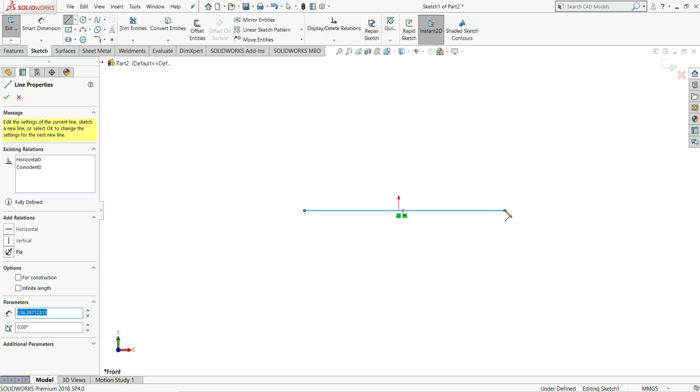So now we will design our first part, which is the base. For that I will select here front plane, sketch. Here I will draw one sketch. For that I will select here one line, draw one horizontal line like this, then vertical, then again some line angular like this.

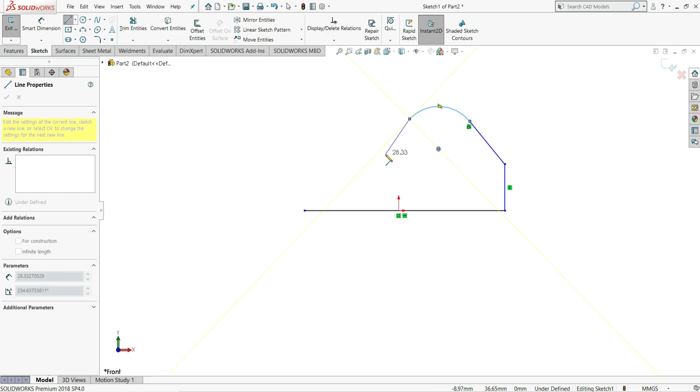Then I'll convert it into an arc by coming back to this point, and you can see it will convert into an arc. Okay, so like this I will draw one arc, then again I have to draw one arc, so I will draw like this. Okay, now we have to select the center point of this arc and this point and make it vertical. Just make this point and this point also vertical.

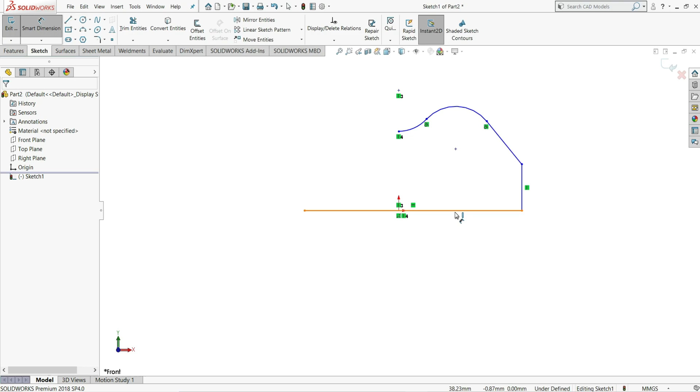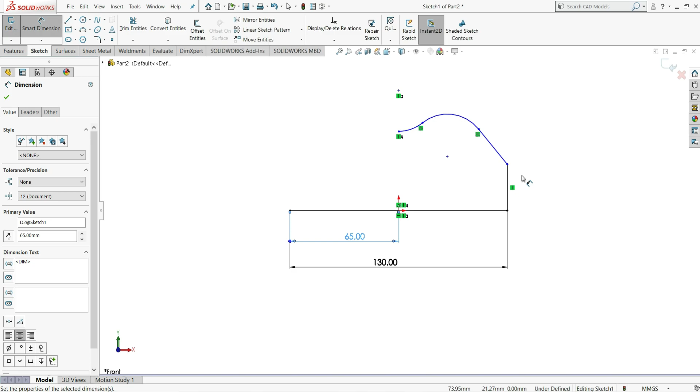Okay, so now let's assign dimensions to this. Select smart dimension. This distance we have to give 130 mm. And from the center point it should be 65 as we want a midpoint. Now we have to give this vertical line distance 32 mm. Enter. Next, from this point to this, we'll give distance 60 mm.

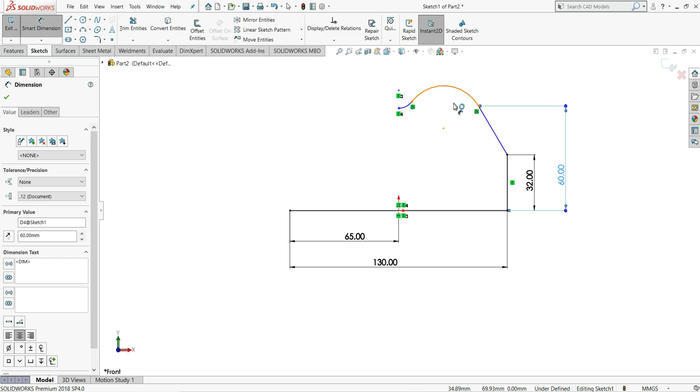Here we have to give a radius 17 mm. Okay. 16 mm. At this point, we have to assign a fillet. So I will select sketch fillet. Select this point. Give here radius 10 mm. Okay. Close it. Now just mirror this sketch that we have drawn.

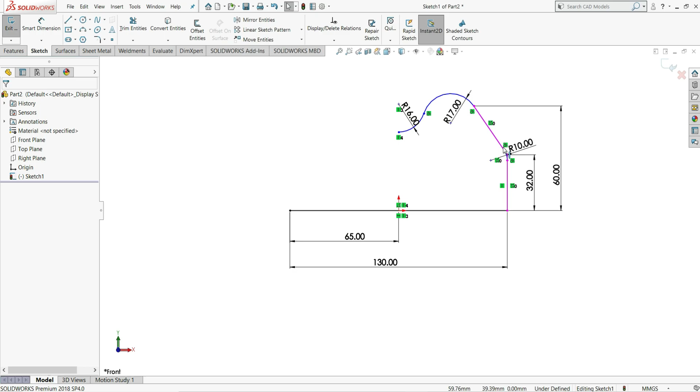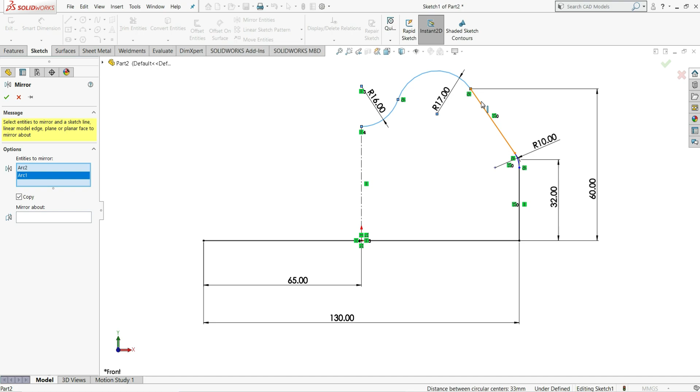I will just draw a center line like this. Okay. Now we have to mirror this sketch. So select mirror entities. Select this arc, then this line, this fillet. It's selecting a point, delete this. Select fillet. Then select this line. Mirror about center line, and then OK. So now you can see it will look like this.

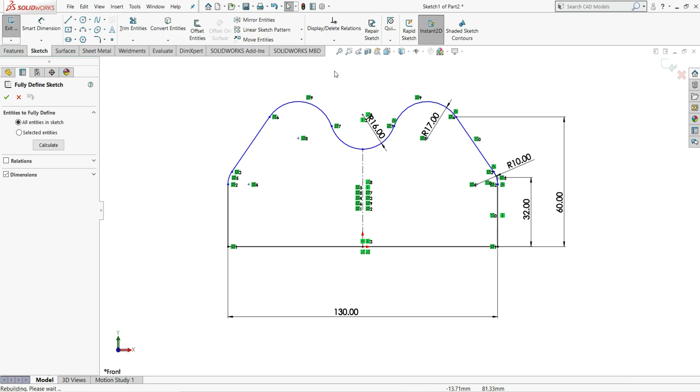So our sketch is now overdefined. Let me delete one of these dimensions. Let me make it fully defined. Just select calculate here, and you can see our sketch is now fully defined. Click on OK. So now we'll just extrude this. Select the reverse direction and give here distance 40 mm. OK.

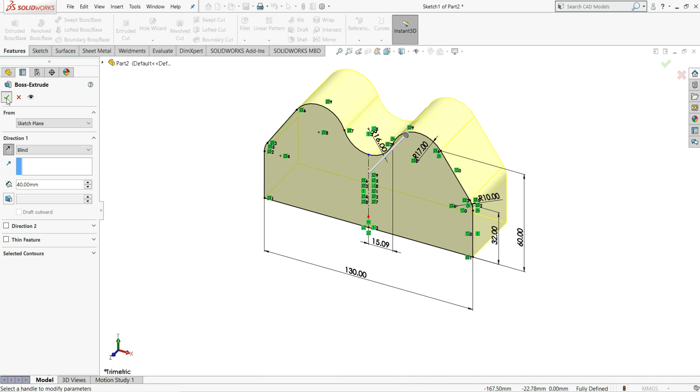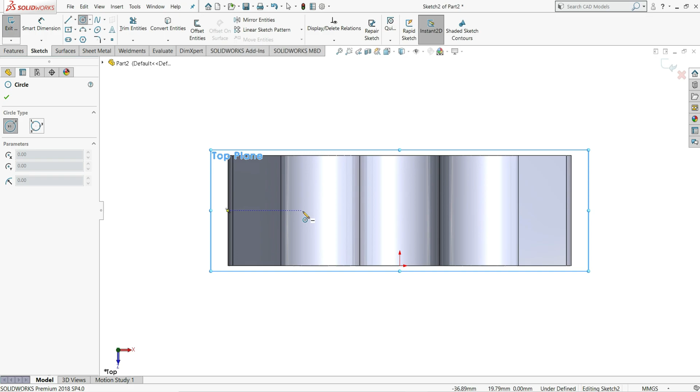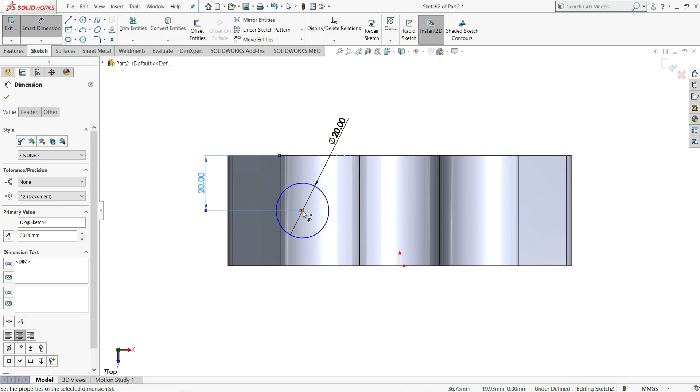Now we will select here top plane and then sketch. Here I will draw one circle, the center point on this line. You can see, draw one circle like this. Now select smart dimension. Diameter will be 20 mm. Enter. Then from this point to this line distance, we have to give 20 mm. From this point to the origin distance, it will be 36 mm. Okay.

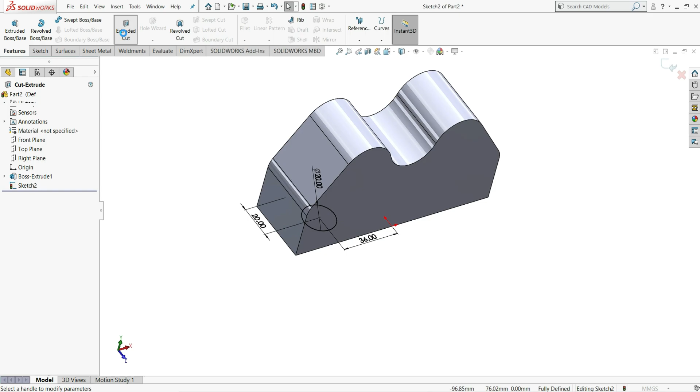Now just extrude cut this. I'll select here extruded cut. So I'll just select through all. Okay. That's it. We have to select here through all. Then okay.

Now we have to mirror this cut extrude, same on this side also. So I'll select mirror. Mirror plane will be our right plane, and I'll select here cut extrude feature. Okay, that's it.

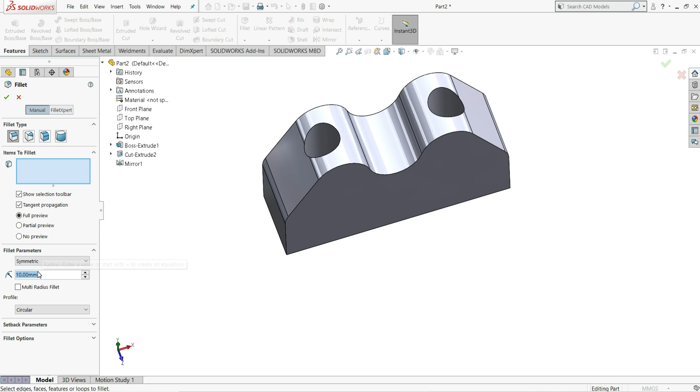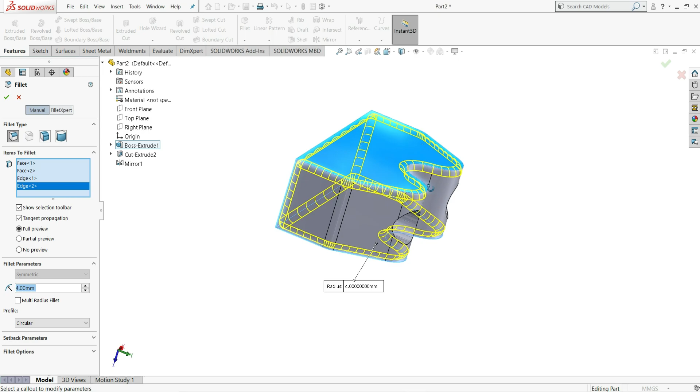We have to just apply here fillets. So I'll select here fillet. Give here radius 4 mm. I'll select this face, same as this backside face, so that all these edges will be selected. Now we have to select this edge also, same as this edge. So that's it. Then just click on OK.

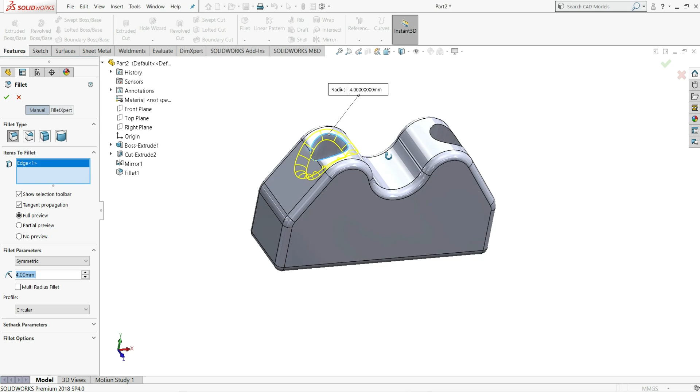Now we have to assign another fillet to this hole. I'll select fillet here. Then just select this whole area. Select this whole edge. We'll select these two edges of the hole and give a 4 mm radius. Okay.

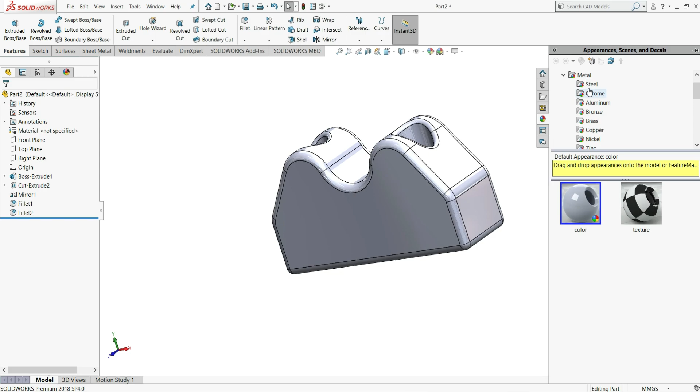So that's it. Let's assign some material to this. In the appearances, I will select metal and then steel. Then just double click on the polished steel and you can see it will look like this. Okay. So our base is created and it's ready. Now just save it by pressing Ctrl+S. Rope clamp base. Okay.

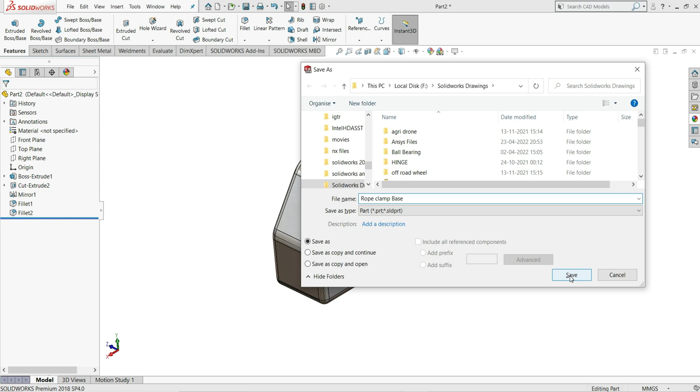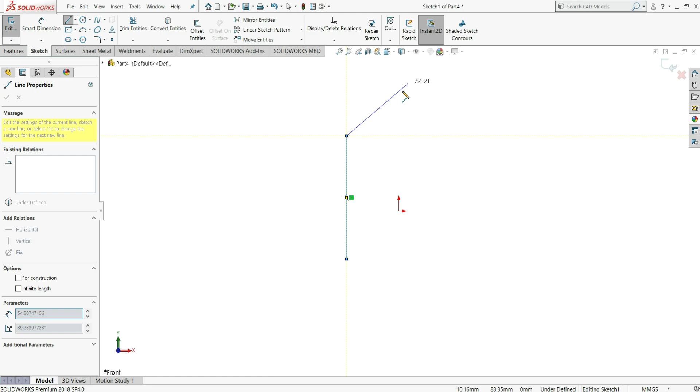Now we will design our second part, which is the U-type nut. I will select front plane, sketch. Here I will select a line, then I will draw a vertical line. Then I will draw an arc like this, horizontally. These 2 points will be horizontal, so that I will draw an arc like this. Then up to this, I will draw one line. Right click and then select.

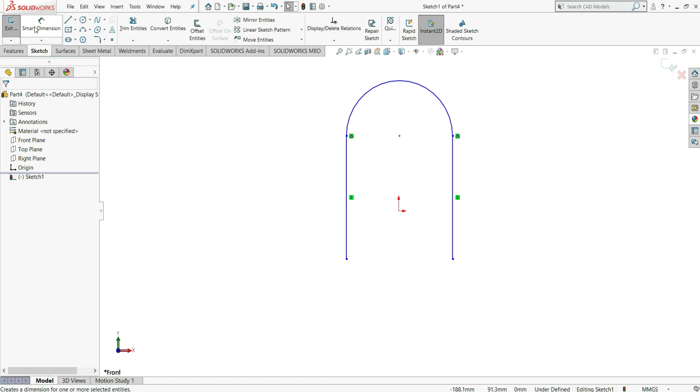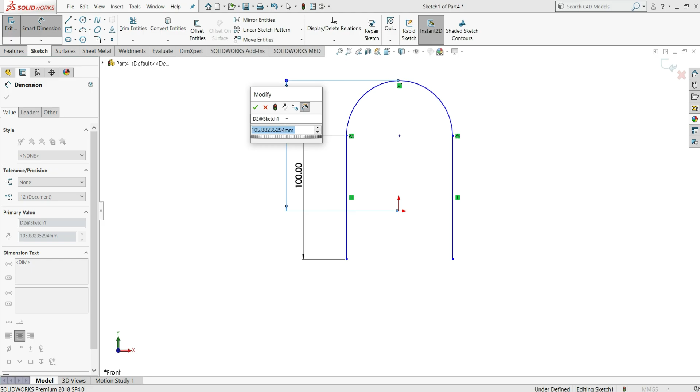Now let's assign some dimensions to this. So I will select smart dimension. And I will give 100 mm from this point to the center point of this arc. Will give this 40 mm. Enter. Let's give distance from this line to this line. Make it 72 mm. Enter.

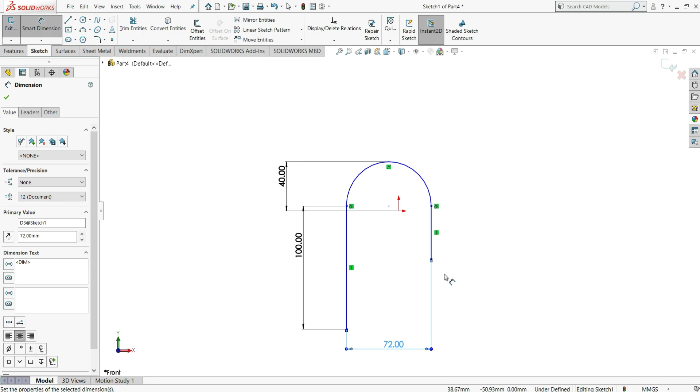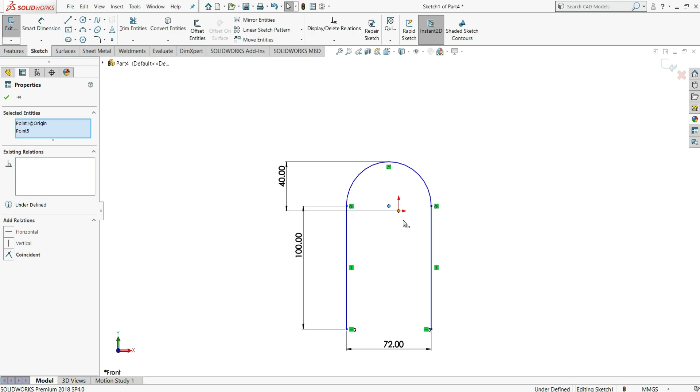Okay. So now escape this and select this point and this point and make them horizontal so that they will be on the same line. Now we have to make this fully defined. So for that, I will just select this point and the origin point and make them vertical, and you can see it is now fully defined. So that's it.

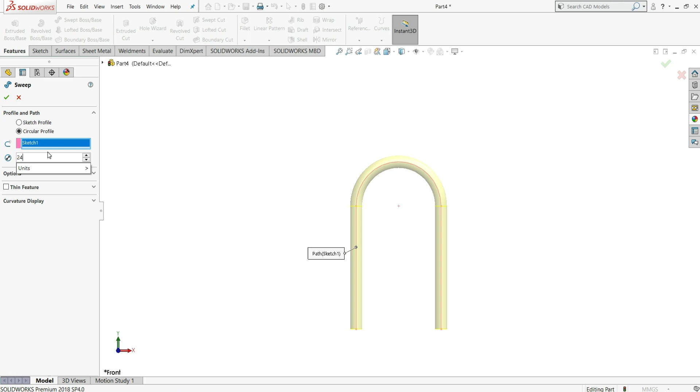Now we'll go to features and select swept boss. Select circular profile. I'll select this sketch. We have to give a diameter of 24 mm, enter, and then OK. Now we have to apply threads to this. So I'll select insert, then feature, and we have to select the thread option. Click on it.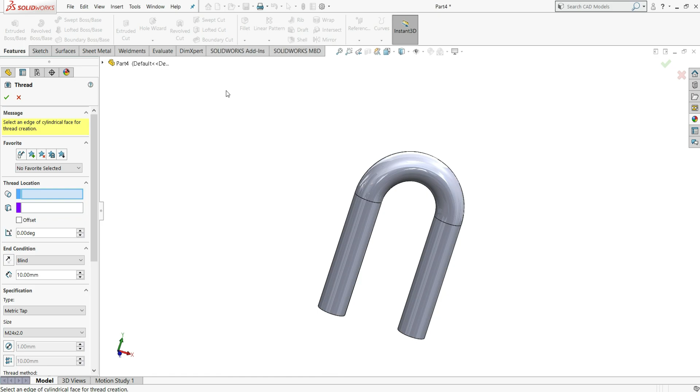Then we have to select the edge. So I'll select this as the edge so that our thread will start from this edge. As you can see, it will start from this edge. Now in the type, we will select metric die. You can see I have given M24 x 2.0. Nothing else we have to change here. We have to keep cut thread and right hand thread.

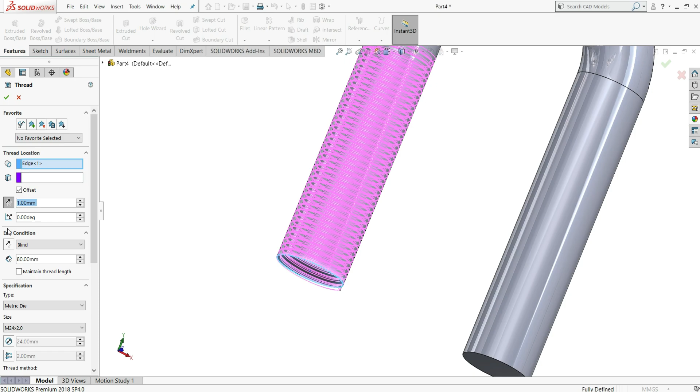We just have to give the end condition and this distance. Okay, so I will give it 80 mm. Then you can see at this last edge, the thread that will be drawn here will not be perfect, as this will be the starting point of the thread. So for that we have to just extend this thread up to this line, so I will select offset. I'll reverse its direction so you can see it's in this direction. Let me give it 3 mm. So you can see it's 3 mm in this direction and 80 mm in this direction.

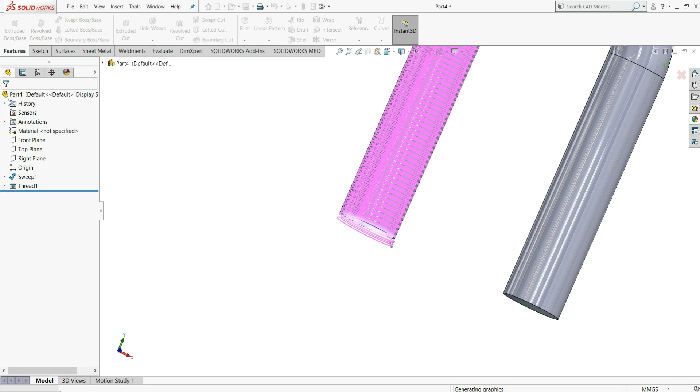But actually it will not be 80 because we have not selected maintain thread length. Okay. So just click on it and you can see it will maintain the thread length of 80 mm from this edge. And it will be 3 mm on this side from this edge. So that's it. Click on OK. So now you can see our threads are applied to this.

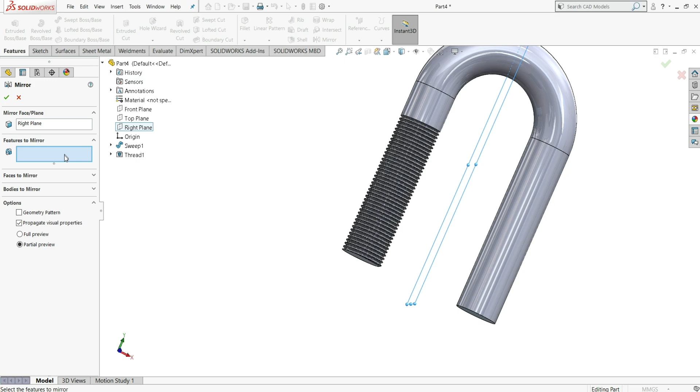Now we want threads on this side also. For that we'll just mirror this. I'll select mirror. We'll give the mirror plane as the right plane, and in the features I will select thread. You can see in the preview the threads are applied here. Click on OK. Okay. So now our U-type bolt is ready.

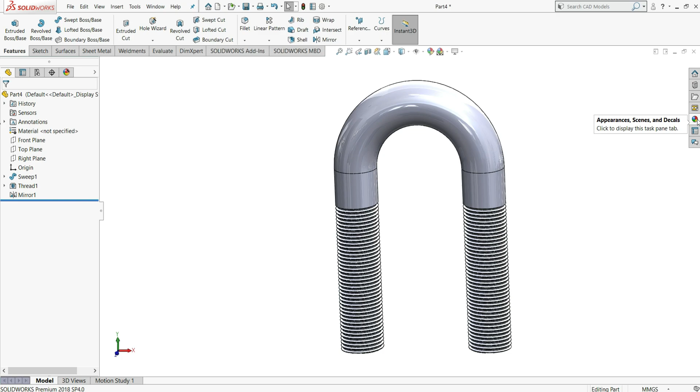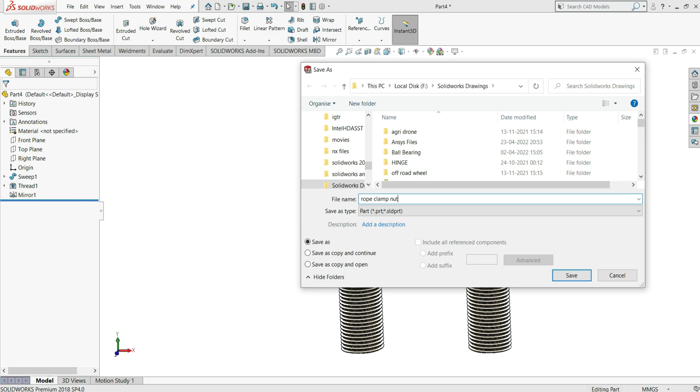Now let's give it some appearance. I'll select polished steel from the steel. Okay. Now let's save this by pressing Ctrl+S, and we'll give it the name rope clamp nut. Okay. Save this.

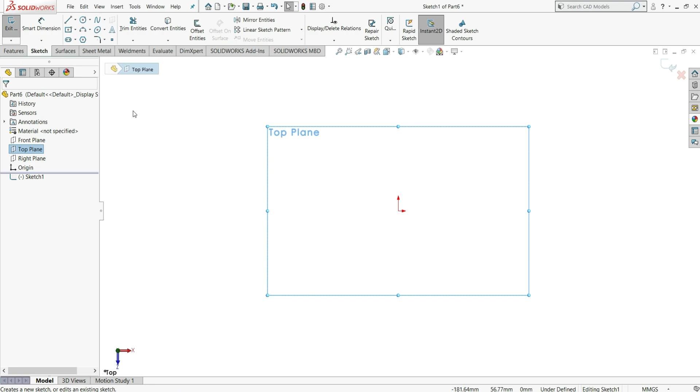Now we will design our last part, which is the hexagonal bolt. So select here top plane, sketch. Here I will draw one hexagon, 6 sides. Select the center point, draw one hexagon like this. Now select smart dimension and give this circle diameter 32 mm. Enter. Now select this origin point and the end point and make them horizontal, and you can see our sketch is fully defined.

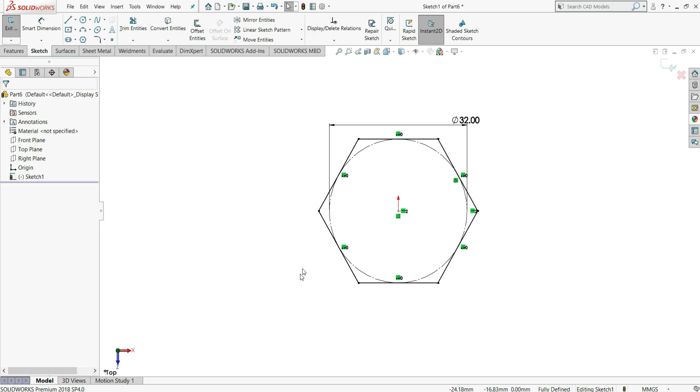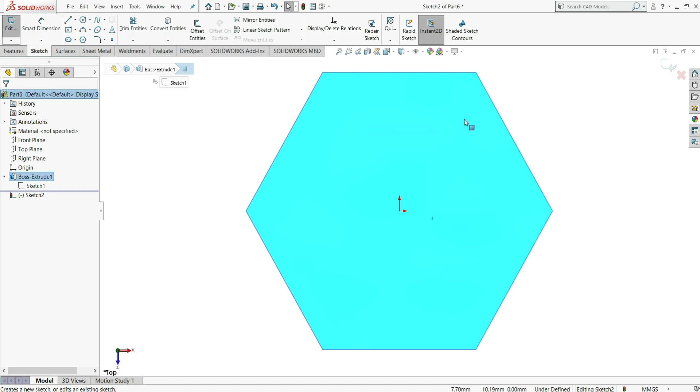Let's go to features and extrude this in a reverse direction, and we'll make it 12 mm. Okay. We have to select this face and then sketch. Here we'll draw one circle. Dimension 24 diameter. Okay, this.

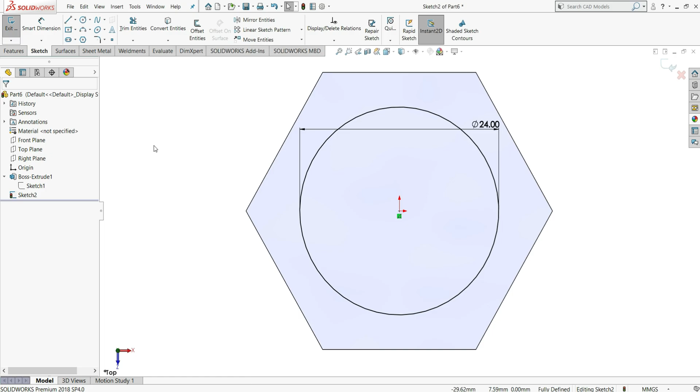Now extrude cut this. 22 or 30, you can keep it as it. You can keep anything, so that it will cut through all. And you can see it is through all cut. Now we have to apply threads to this. So I'll select here insert, then features, then thread.

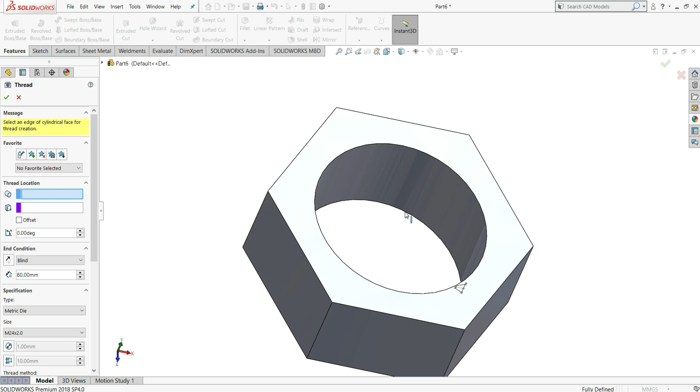Select this lower edge. Let me give it end condition to be 15 mm. And you can see it's dual thread. Same as it is, we want this side. So I'll select offset, reverse direction, 3 mm same as it is. Click on maintain thread length.

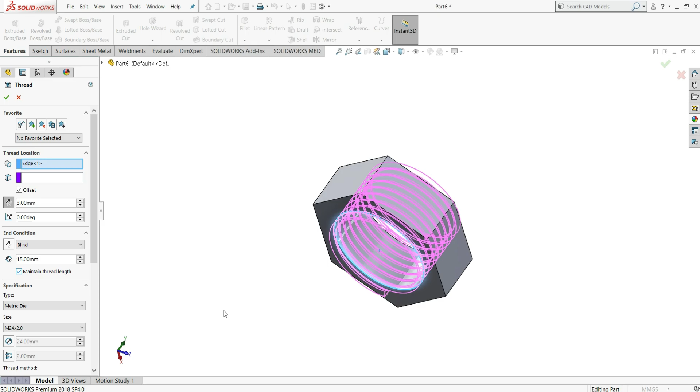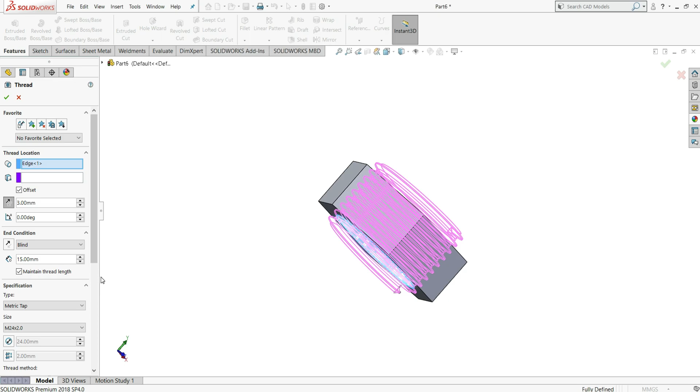Okay. Now in the type, we have to select here metric tap. And the size will keep same as it is, M24 x 2.0. Thread method will be cut thread and right hand thread. Everything will be as it is. So now just click on OK and you will see the thread is applied.

Now just select this face, then sketch. Now here I will draw a circle like this up to this edge. Then select this circle and this edge and make them tangent. So now you can see it's fully defined. Now just select features and extruded cut.

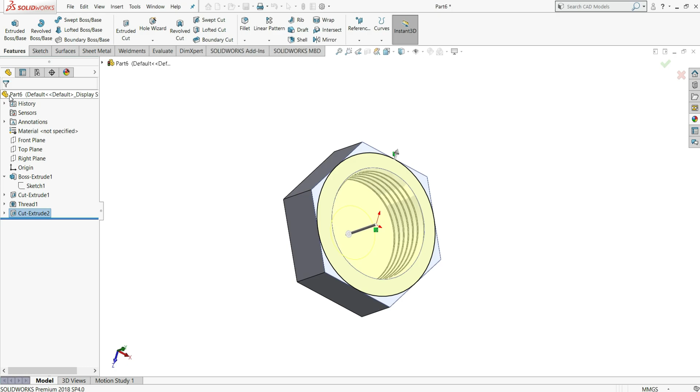Distance 10 mm. Then click on flip side to cut as we want to cut the outside part. And then we'll give here a draft of 45 degrees. Then just click on OK, and you can see this outer part will be cut. Same as it is, we want it on this side. For that, we want one plane in the middle of these two faces.

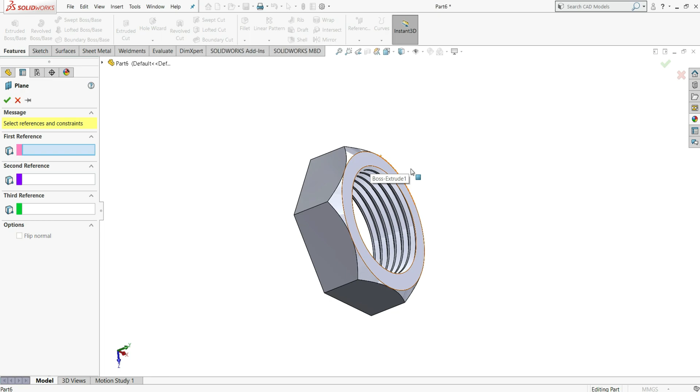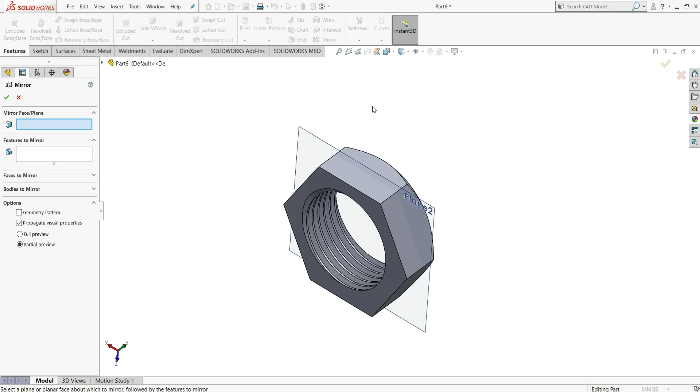So I will select reference plane. Select this face as a first reference, then this bottom face. And you can see the plane between these two faces will be created like this. Click on OK. Now we have to mirror this. So I will select mirror. Then just select this face as a mirror plane. Then in the features, I'll select this cut extrude. Okay.

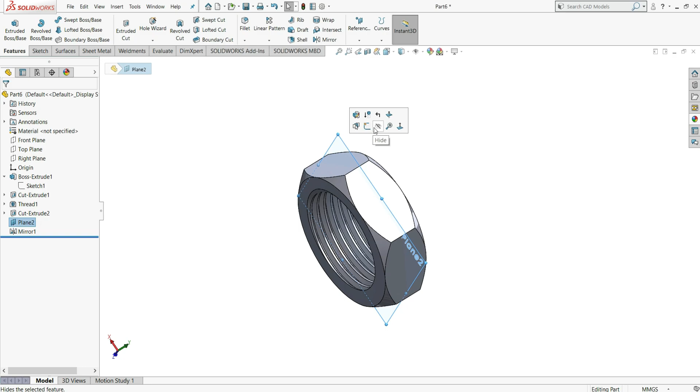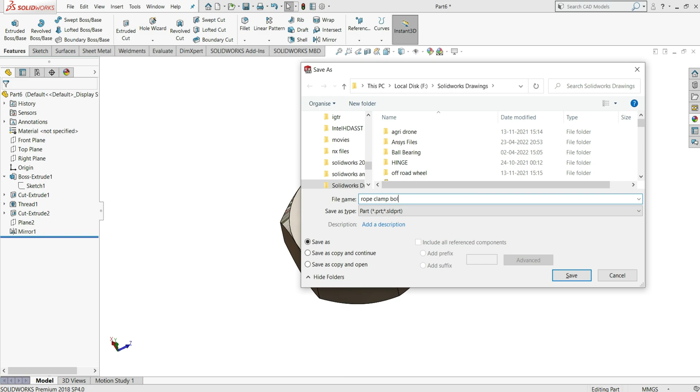Select this plane and hide it. So now our bolt is ready. Just give it some appearance, polished steel. Let me save it: rope clamp bolt. Save it. So now we have created all of our parts. Now we will proceed further for the assembly of these parts.

So now we have opened here a new assembly and now I will import some parts in this. So for that I'll select here browse and I'll select the parts that I have to import. I'll select here rope clamp. So I will import here rope clamp base, rope clamp bolt and nut. I have selected these three parts. Then just select open. Now one by one click on this graphical area.

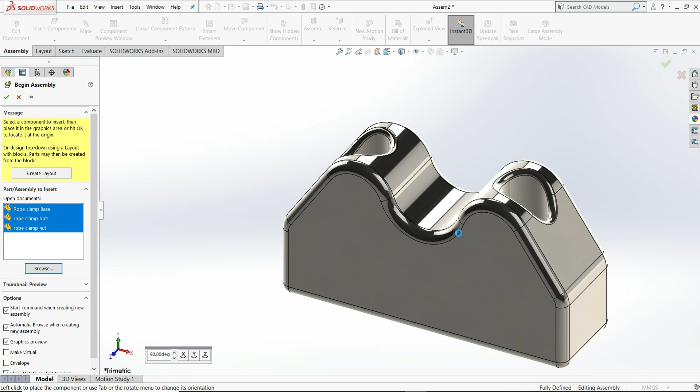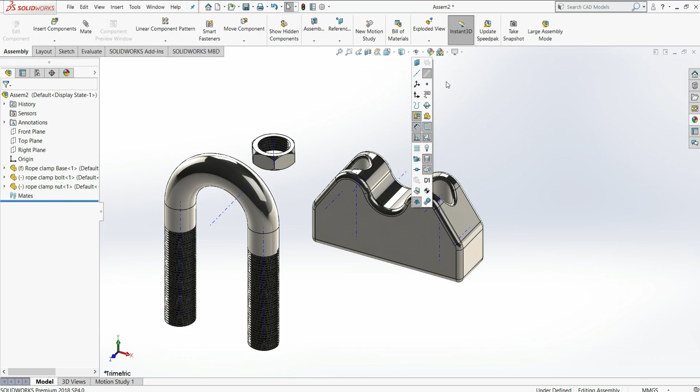So I will click here. So one part is imported. Same as it is, click here so that the second part is imported, and then the third part. So now all of these parts are imported here. Now I will just select this eye button and select view temporary axes. So you can see these axes are shown. Now you can see this base is fixed and it will not move. This will move, this will move, as it is not fixed.

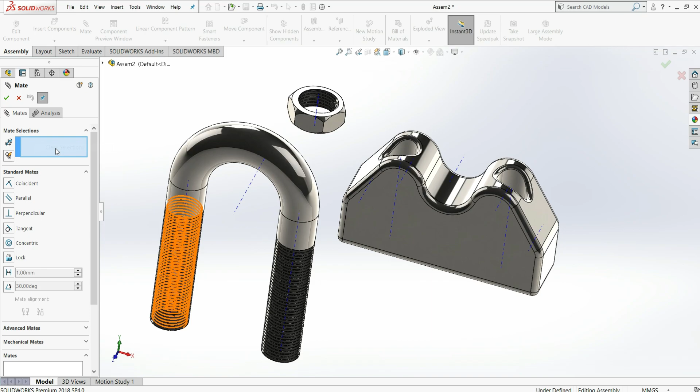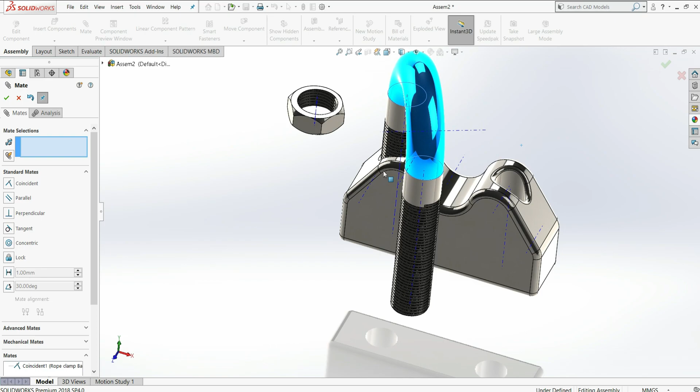So now we have to select here mate. So now I'll select the axis of this U-type bolt and the axis of this hole. Once I click on both, just click on OK. Now you can see once I rotate like this, it will move. So we have to fix this axis also. For that, I'll select this axis and the hole axis.

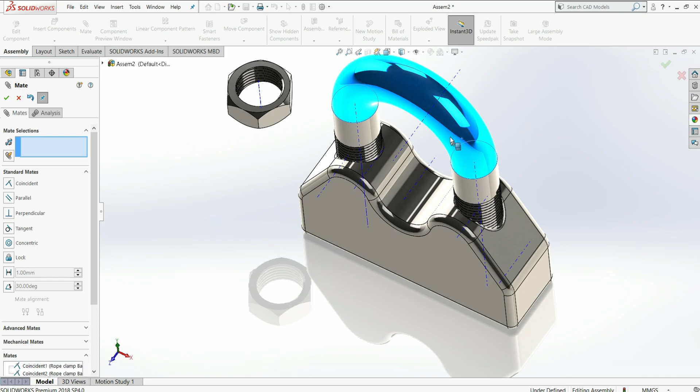Just coincident them. Okay. Now you can see it will not move. It will just move upside and downward. Okay. Now let me move it somewhat like this. And then I'll give here some distance mate. So for that, I'll select this face and this face.

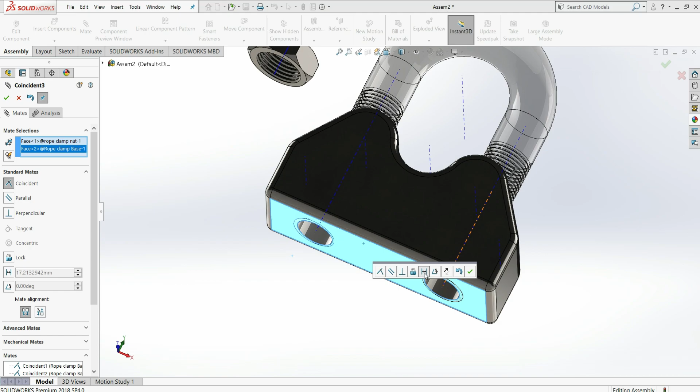Then in this, we can see here the distance option. Click on it and give here some distance of, let me give it 35 mm. Okay. Yes, 35 mm is perfect. Then just click OK. Now we want 2 bolts. As you can see here, only 1 bolt. Now let me click OK on this.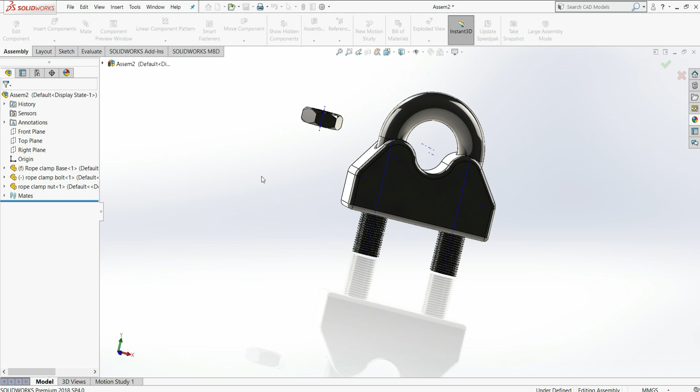Okay. So now we want 2 bolts, but we have only 1. So we have to make another one. For that, I'll just copy this. Just select this bolt and drag it here by pressing Ctrl. You can see by pressing Ctrl and dragging this, another bolt will be created. Now let me move it somewhat here so that you can see like this, and this one also to here. Okay.

Now let me select the central axis of this bolt and click on mate. Now we will select mate here, select the central axis of the bolt and the axis of this thread. Okay. Then we have to click on mechanical mates. Then we'll select here screw.

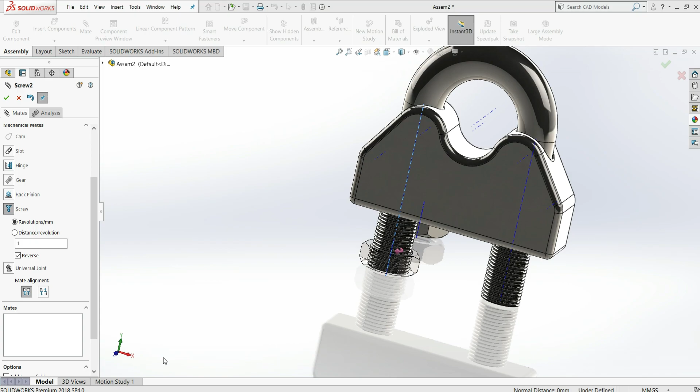Distance we will keep here as revolutions per mm. We'll give here 1 revolution per 1 mm. As you can see, we have kept here 1. This means once 1 revolution completes, it will move 1 mm distance. Okay. Just click on OK.

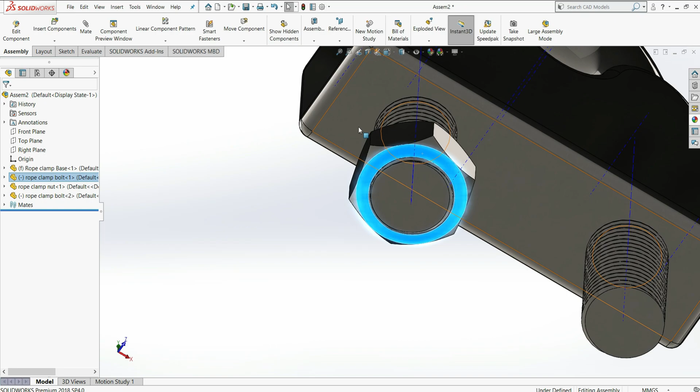Close this. Now let me rotate it. You can see once I rotate in a clockwise direction, it will tighten this. And once I rotate in the reverse, anti-clockwise direction, it will loosen. But you can see once I loosen this, it will go beyond this thread. Let me rotate this. It will move beyond this thread. You can see there is a clear gap, and it will not stop at this face.

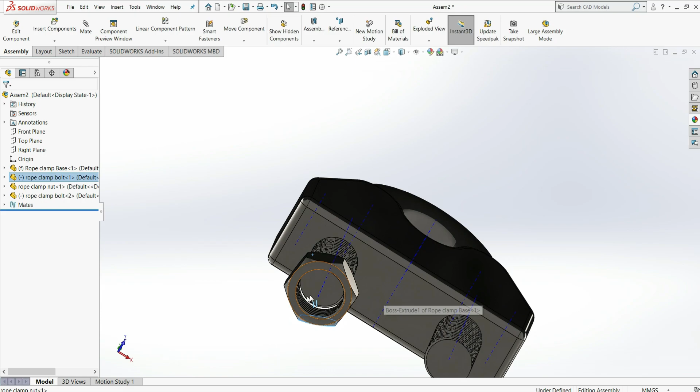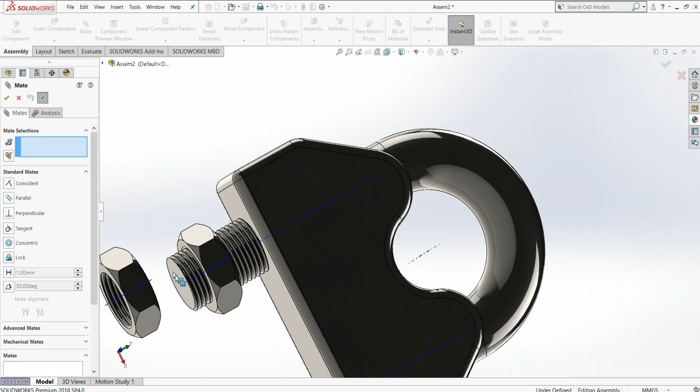So to stop this at this face, we have to give here another mate. So I will just tighten it. So I have tightened this. So I have to stop the movement of this bolt at this face. For that, I will click on Mate. Then I'll select this face. And then the bottom face of the bolt.

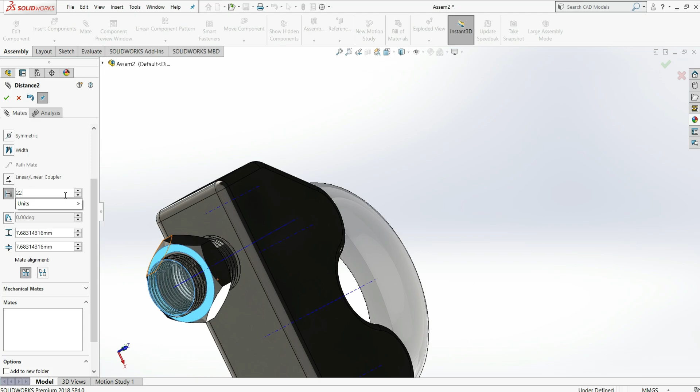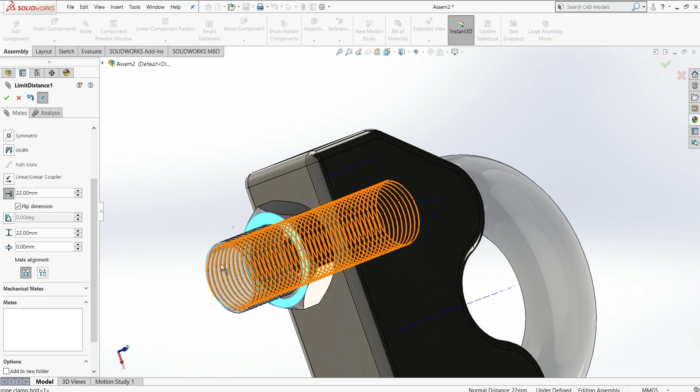Then we'll go to Advanced Mates. And here you can see this distance option. Click on this. Then keep the distance 22 mm. This one will be the maximum distance. It will move only 22 mm on this side. Then in the minimum distance, I will give 0. So this will be its minimum distance, 0. It will start from this 0 point and move only 22 mm on this side.

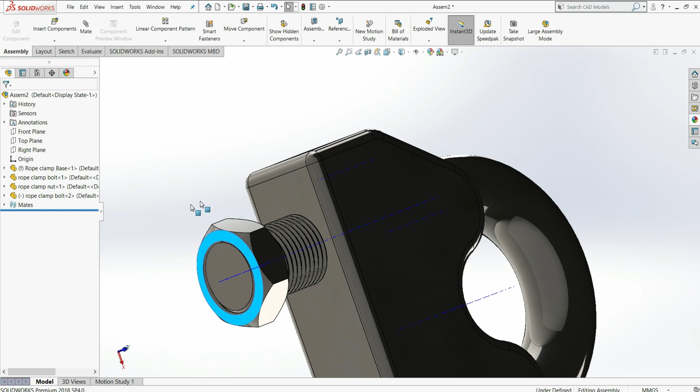So just click on OK here, close this, and you can see once I rotate it in a clockwise direction, it will stop. You can see it is stopped. Now let me reverse direction. Now you can see it will stop here like this. It will just rotate like this, but it will not move beyond this face. Let me tighten this again. Okay, let me keep it like this.

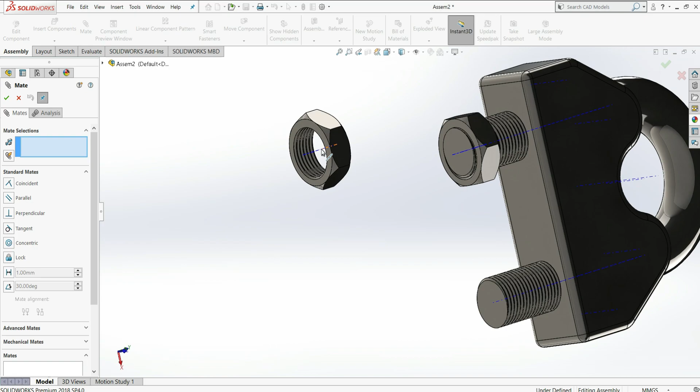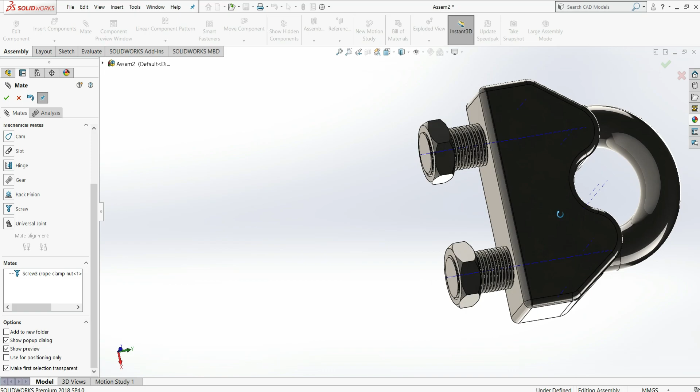Now the same mate we have to give to this. So I'll select mate again. Now this axis. Then we'll select mechanical mates. Then screw, revolutions per mm, 1 mm, and OK. Sorry, rotate this so that you can see it will move forward.

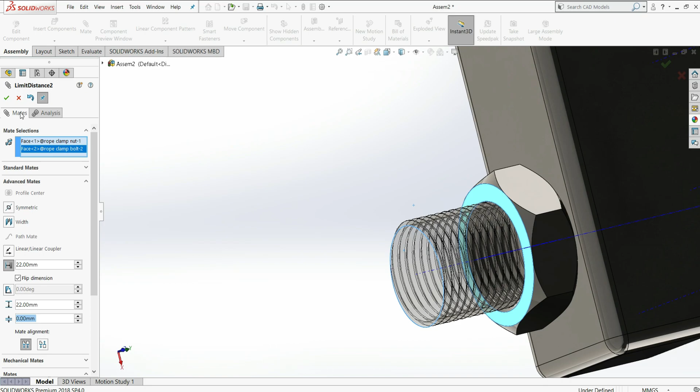Now we'll give a distance mate here. So select this face. Click on advanced mate. Then distance, give the same 22 mm. Then minimum distance we will give as 0 mm. Click OK. It will not move beyond 22 mm. So now let me change its background so that it will be clearly visible.